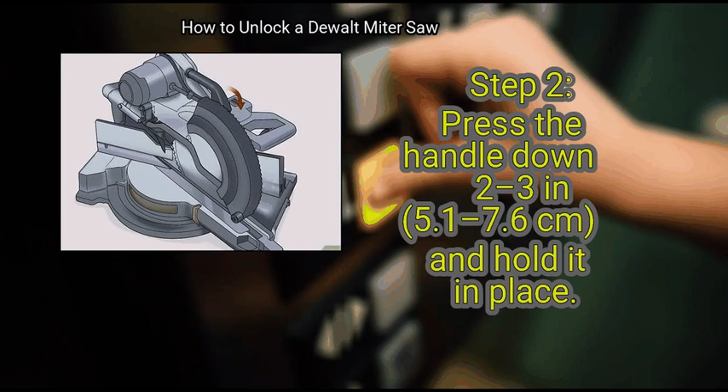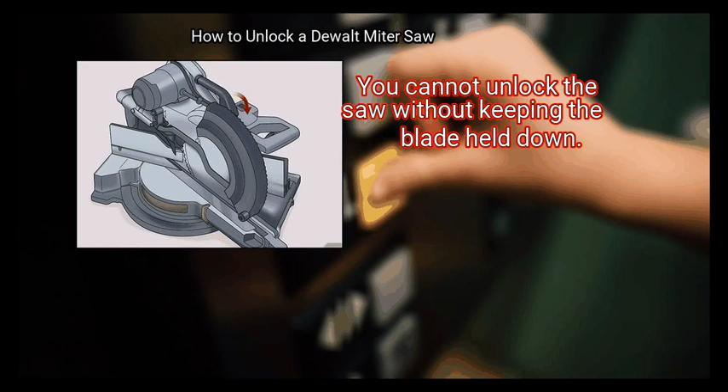Step 2: Press the handle down 2 to 3 inches, 5.1 to 7.6 centimeters, and hold it in place. With your hand firmly on the handle, press the saw down a little and hold it in place. You cannot unlock the saw without keeping the blade held down.

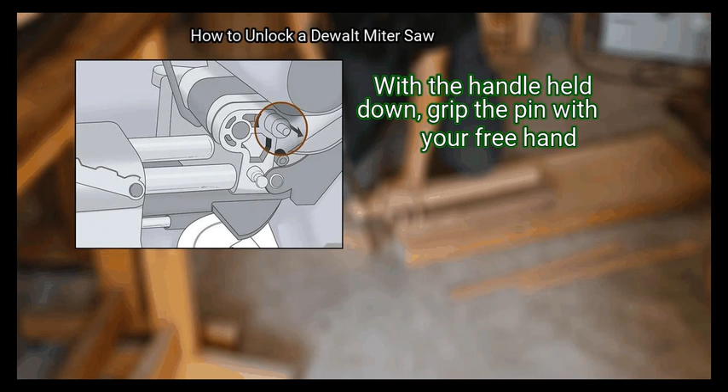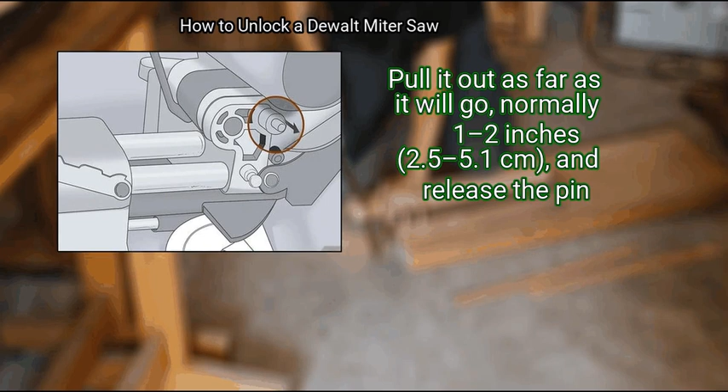Step 3: Pull the pin out 1 to 2 inches, 2.5 to 5.1 centimeters, to unlock the saw. With the handle held down, grip the pin with your free hand. Gently pull it out away from the rail it is connected to, as far as it will go, normally 1 to 2 inches, and release the pin. Your saw is now in the unlocked position and you can move the blade freely.

Whenever the pin is sticking out, the saw is unlocked. Always check this pin before picking your saw up to move it somewhere else. On a Dewalt compound sliding saw, pulling this pin out allows you to move the saw up and down on the rail that it's attached to as well.

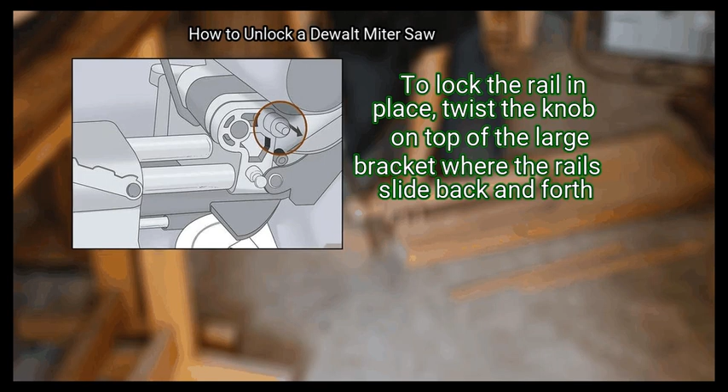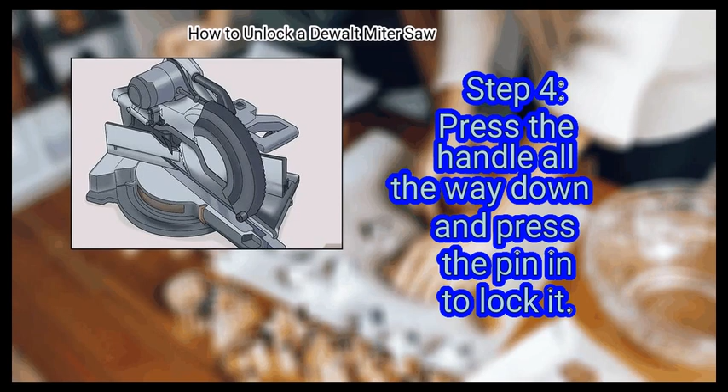To lock the rail in place, twist the knob on top of the large bracket where the rails slide back and forth. Turn this knob clockwise to tighten it in place. Finally, press the handle all the way down and press the pin in to lock it.

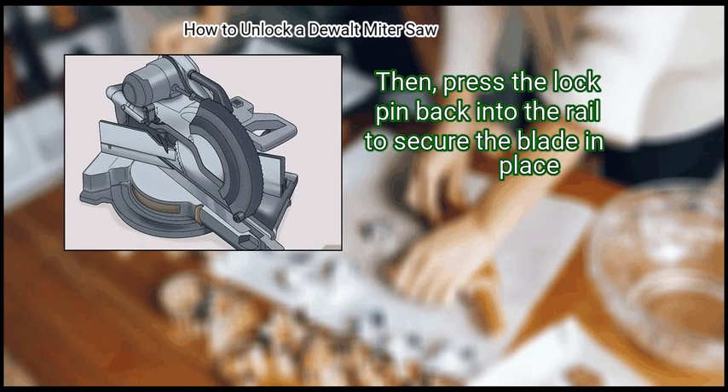To lock the saw, press the handle down until the blade is as low as it can go. Then press the lock pin back into the rail to secure the blade in place. Ensure that the saw is locked by pulling up on the handle with the pin pushed in. If the handle doesn't move, your saw is locked.

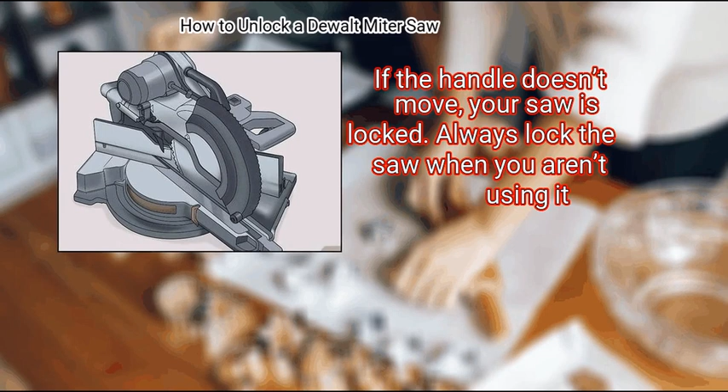Always lock the saw when you aren't using it. It is dangerous to leave a saw unlocked, even if it isn't plugged in or running.

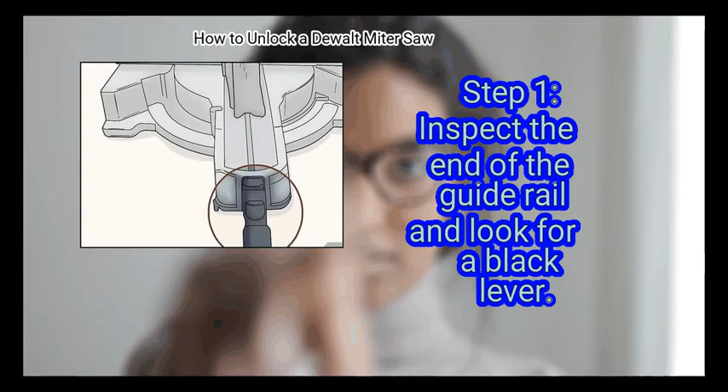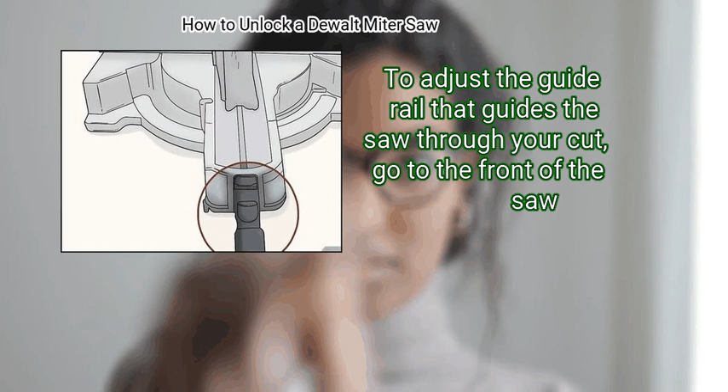Method 2: Moving the guide rail on a compound saw. First, inspect the end of the guide rail and look for a black lever. To adjust the guide rail that guides the saw through your cut, go to the front of the saw and follow the horizontal guide rail to the tip furthest from the handle.

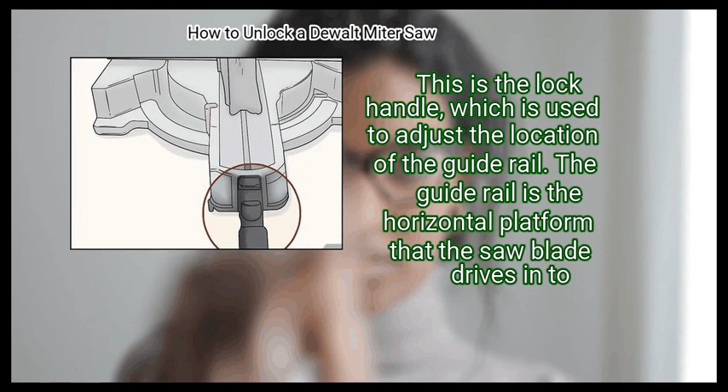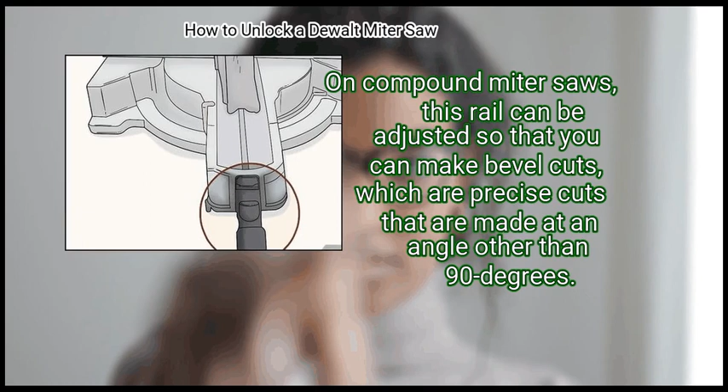Look for a black lever sticking out of the saw at the end. This is the lock handle, used to adjust the location of the guide rail. The guide rail is the horizontal platform that the saw blade drives into. On compound miter saws, this rail can be adjusted so that you can make bevel cuts, which are precise cuts made at an angle other than 90 degrees.

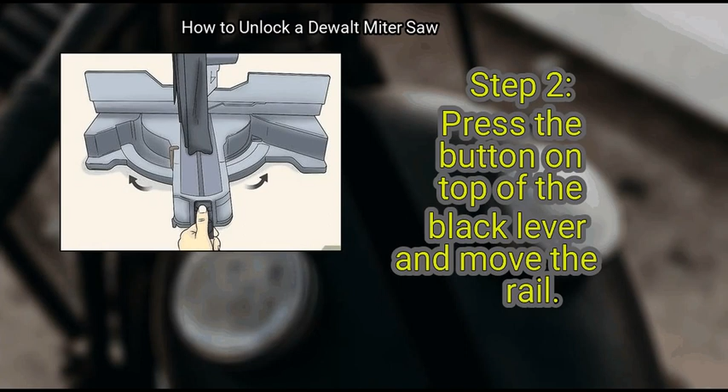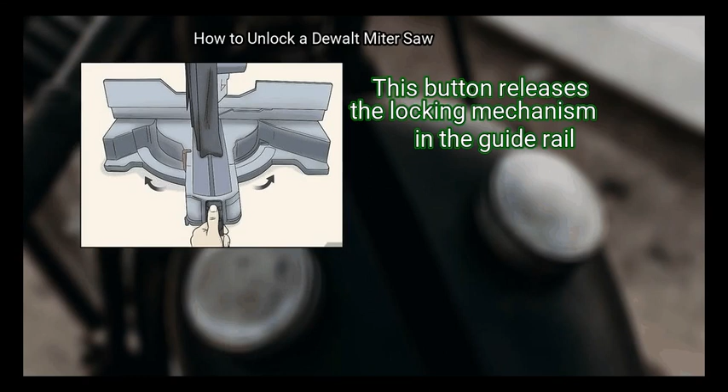Step 2: Press the button on top of the black lever and move the rail. If the lever is pointing down, flip it up so that it is flush with the guide rail. Then inspect the top of the lever and look for a small black button. This button releases the locking mechanism in the guide rail.

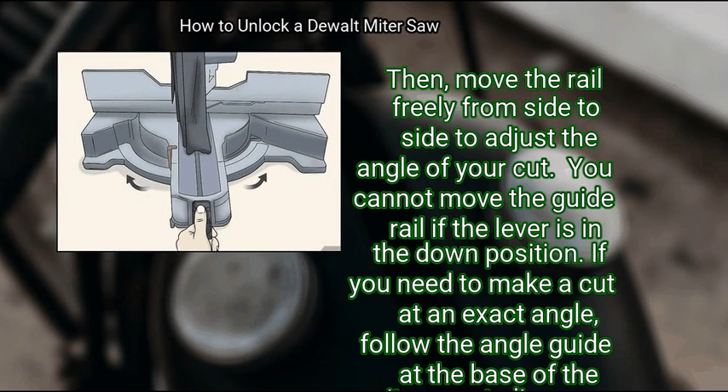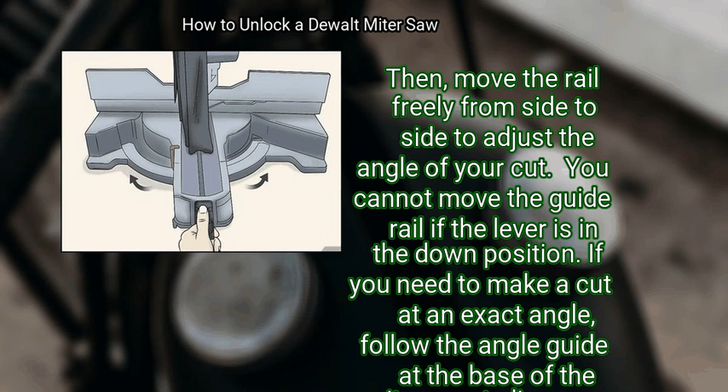Press this button and hold it down with your finger. Then move the rail freely from side to side to adjust the angle of your cut. You cannot move the guide rail if the lever is in the down position. If you need to make a cut at an exact angle, follow the angle guide at the base of the miter saw to line your blade up with a specific angle.

Finally, release the button and push the lever down to lock the rail. Once your compound miter saw is resting at the desired angle, release the button. Then press down on the end of the lever to snap it into the locked position.

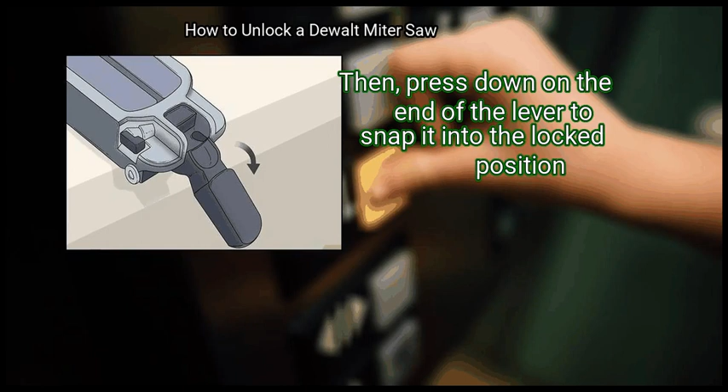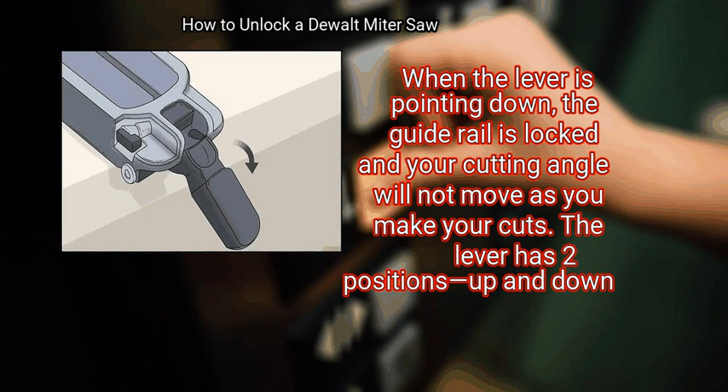When the lever is pointing down, the guide rail is locked and your cutting angle will not move as you make your cuts. The lever has 2 positions, up and down. You will feel it snap into place every time that you move it.